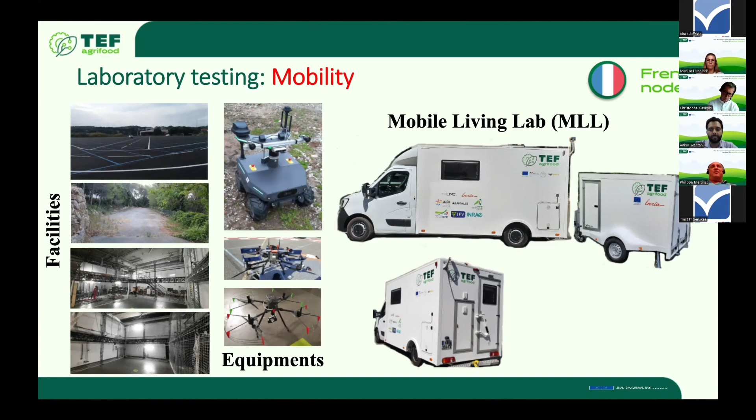We have mobile robot, we have UAV, and our particularity is that we have a mobile living lab, so we are able to move the laboratory to the land. Thank you for your attention.

The first one is this one, so it's a 100% simulation facility, in which any kind of AI developer or perception or mobility algorithms developer can reach out to us and just ask us to build up this simulation environment. It's 100% tailored to his needs and how we can develop his solution. And we are providing him all kinds of different sensors for vision and perception. It could be LiDAR, vision, infrared, or thermal, for example.

And we can test it together with him in order for him to, for example, choose any kind of sensor that is adapted to his use case, and also to provide him some new data that could be used to test the robustness of his algorithms. That's how it helps him develop his solution and assess it in terms of performance. And of course, that's 100% simulation, so we don't rely on the land and we don't rely on real data acquisitions. So our partners save time and also raise their TRL levels quite easily through simulation.

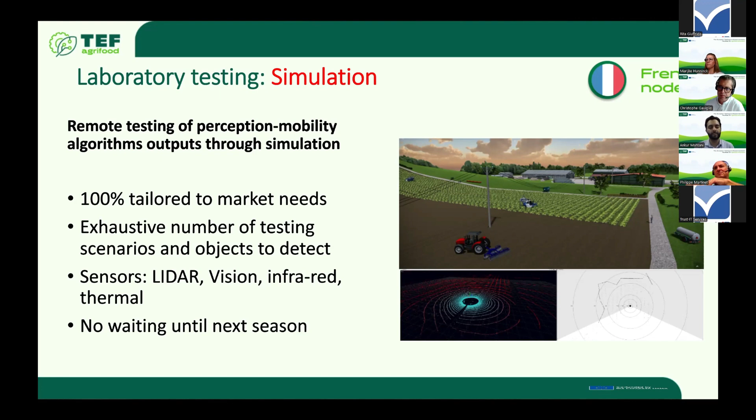And another facility, which is on the next slide, is the robot immersion, in which you have the simulation area, which is 100% exhaustive and in which we can test any kind of obstacles or algorithms. And it's hybrid with some hardware-in-the-loop system. So we can test the robot, host it in this kind of infrastructure, and have it run just as it would in a real land, for example. And we can test all kinds of performance.

For example, one important performance is the processing performance and response time. It's very important to have that quantified before going to the land and before testing it in real life conditions. We can also test grip and ground resistance on the conveyor belts you can see here in the picture. And we can test the complete chain of acquisition and processing up to the decision of moving the robot in one way or the other.

And finally, all these evaluations and tests of embedded AI help provide some simulation inputs to our partners, and also test robustness against, for example, glaze. So we can simulate glaze in this infrastructure, sunlight, or even different kinds of noise. And we can, of course, measure the response of the robot. Finally, all the perception edge cases can be tested here, and also virtual destructive testing if we want, for example, to test the collision of a robot with an obstacle before going to the land.

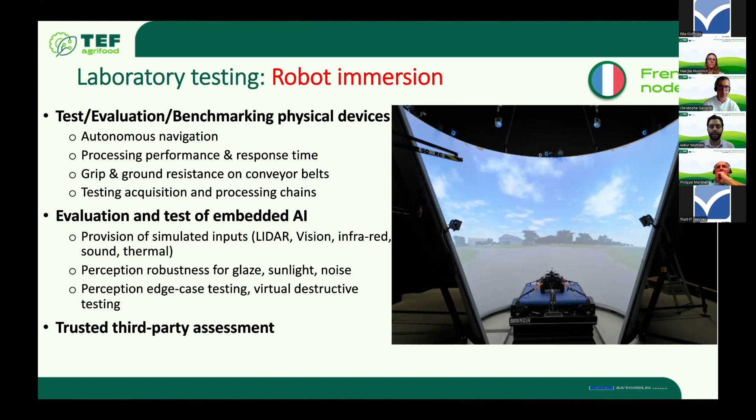And of course, LNE is a trusted third-party assessment, so we can do it as a trusted partner also, and that helps our partners prove their performance and also gain trust in their solution. I'm now going to give the mic to my colleagues from IFV and Arvalis, who are going to present robot testing in viticulture and in arable culture.

Thank you and good morning, everyone. So I will start and I leave the floor to Régis for arable culture after. I'm going to start with viticulture. I work in the French Institute for Vine and Wine, and I'm going to explain how we can provide services in agrifoodTEF for robotics.

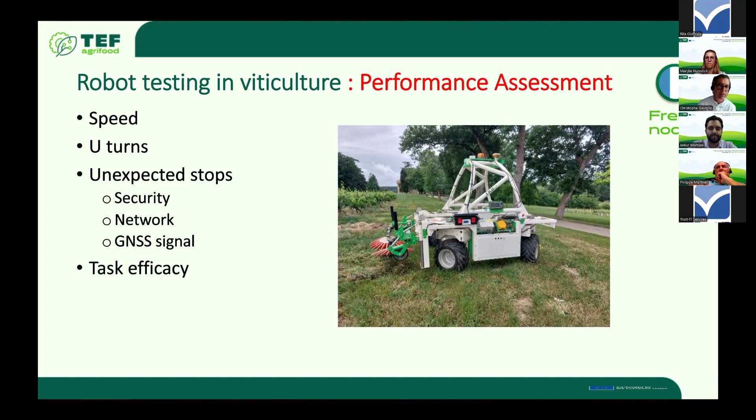I'm going to present 4 use cases, and the first one is robot testing for performance assessment. Obviously, we can measure all the very important parameters to determine the global performance of a viticulture robot. For example, speed, the time it takes for the robot to make a U-turn. We can measure and determine why we have unexpected stops in the field—is it for security matters, for network matters, and so on. And last but not least, we can measure the efficacy, the efficiency of the task that the robot is supposed to do. In viticulture, it's most of the time weeding, so we can assess the weeding efficacy. This gives us a global assessment of the performance.

The second thing that we can provide in the agrifoodTEF project is prototype development.

Here we have a map which represents the experimental vineyard that we have. It's almost 15 hectares of vineyard with different kinds of soil, different conditions of slopes, and also all the facilities to store a robot, access to a workshop if we have to work on the robot, to make changes, also access to charging points for the electrical robots, and every facility you need to assess the performance of a prototype.

Of course, we can benchmark this performance with all we know about the practices in viticulture. And this is interesting for every robot manufacturer, to know how a prototype fits the end user's needs before launching it on the market.

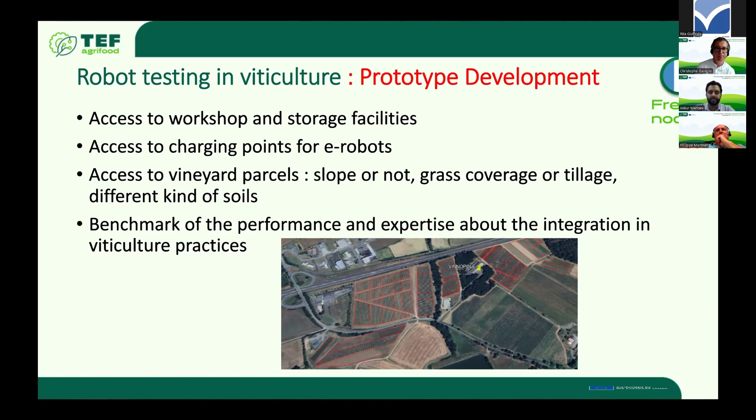So the third service we can provide in matter of robot testing is a cost and benefits assessment, because robots are meant to do the weeding essentially, but not only. And we are able now to compare the cost of use of a robot with the cost of use of a tractor in the vineyard.

On all aspects of the cost, like operation, maintenance, and workforce burden during the use. Of course, we can complete this cost and benefits assessment with life cycle assessment, because we have some specialists at IFV, not on our experimental vineyard, but we can collect all the data that they need to do the life cycle assessment.

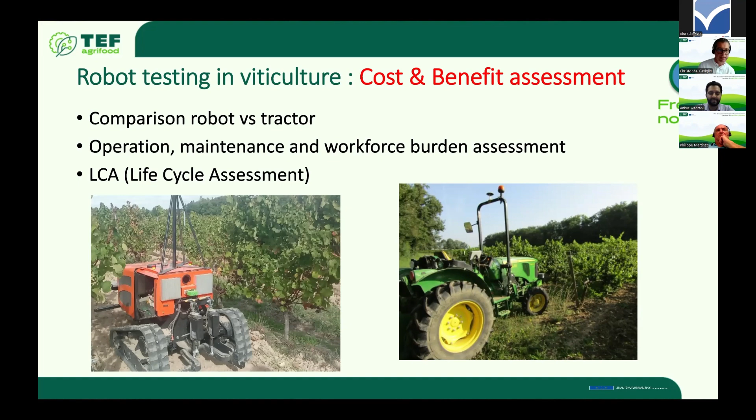The fourth service we can offer about robot testing in the vineyard is the agroecological approach that we can bring, because this is a big subject today. Robots are meant to use less pesticides in the vineyard.

And we can compare all the production process in the vineyard with or without robots. We can assess the impact of robot use on soil compaction, for example. We can assess also the use of energy for the same tasks. Of course, we can measure the impact on chemical inputs, and of course on the efficiency.

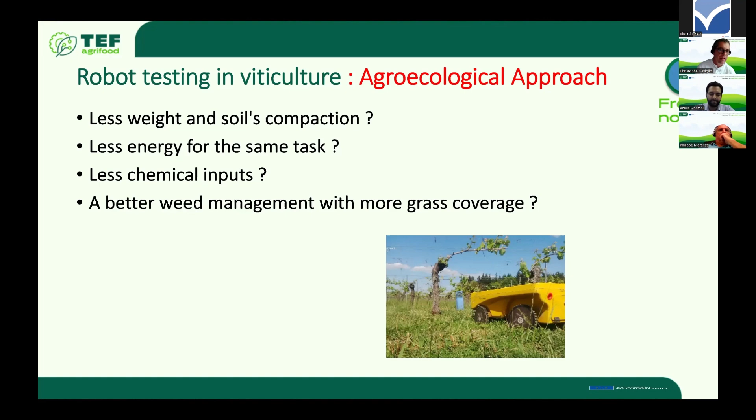Thank you very much. Bonjour, with my French accent on my horrible English. Well, Arvalis, it's also a technical institute like IFV, like Christophe, but we are specialized in crops and mainly in wheat, maize, and also flax and potatoes.

The largest scale that we can offer is to test, calculate, or estimate what will be the consequence of a robot in the cropping system at farm. And for this, we've got a quite good tool. The name of this tool is Systerre. It's a web tool, and we have a lot of different kinds of farms, for example, farms with lots of wheat or other kinds of farms, and we can just estimate what will be the effect of the use of a tool.

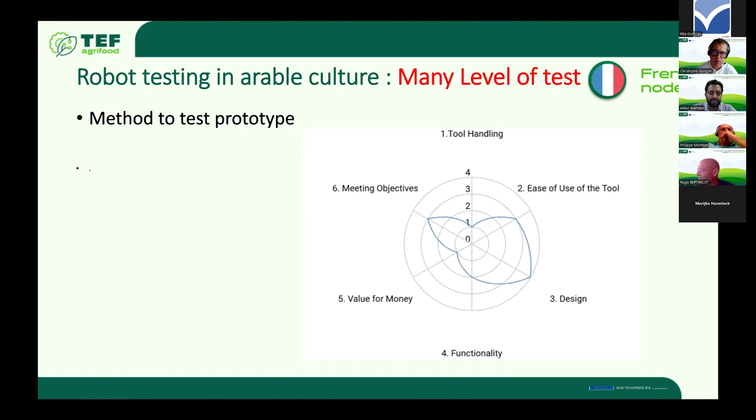That means there is a mix between the map of data sensor acquisition and the map of presence of weed. And of course, we also control by hand, because our job is also to go on field and check if the robot did a good work. In the last picture, you see two technical people checking if the effect of the robot was good or not, and they need a precise location, so they use a very precise pedestrian GPS.

So these are just some examples of what we can do in Arvalis for your robots, from the insertion of the robot in the cropping system to testing a technical part of your robot. Thank you.

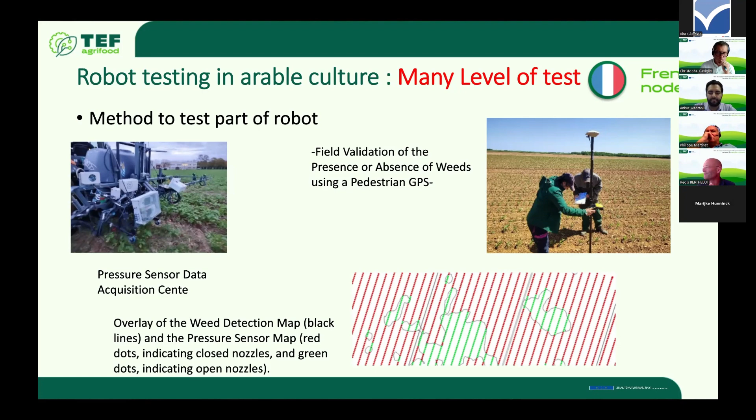Okay, thank you, Regis. I'm Adriana Sanchez from the French Research Institute for Agriculture, Food and Environment, and I'm presenting the safety and performance testing for autonomous machines.

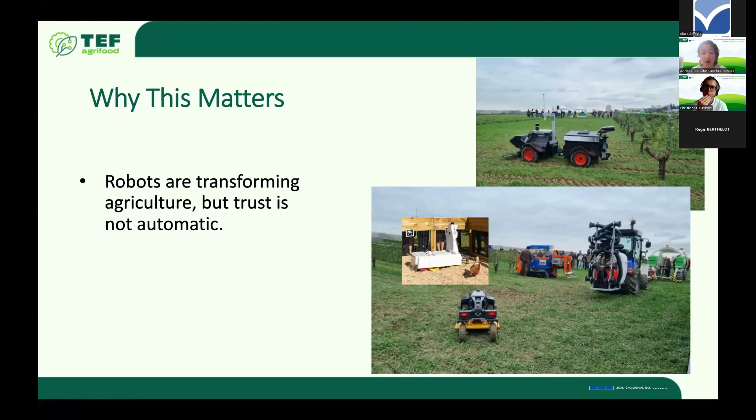So to start, let's make clear that autonomous robots offer significant benefits for agriculture and are transforming the way we produce food. But now I propose we take a step back and ask ourselves, are these robots safe enough? Because robots operate in complex conditions and environments, while they must ensure safety.

This is where robots testing and validation becomes essential, and it's where we come in. Through the AgrifoodTEF catalog, AgroTechnoPôle, which is the platform involved in this project, we offer 6 agricultural robotic performance assessment tests, better known as ARPA, which are essential to test if your robot is ready for deployment from the safety and performance point of view.

The first 4 tests are related to safety, and the last 2 are related to trajectory performance. Let's take a quick overview. ARPA 1, for example, helps you ensure that your robot can detect and react to static obstacles, which offers a huge advantage of reducing the risk of accidents.

With ARPA 2, we go further by testing how your machine performs in hard conditions such as rain or fog, and this helps ensure that the robot operates reliably in these conditions.

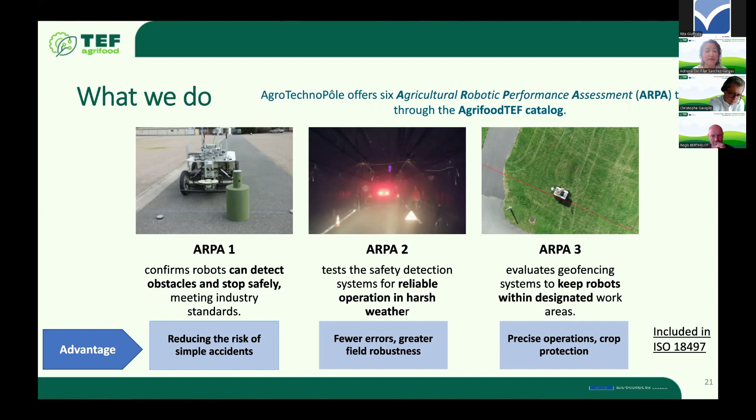ARPA-4 verifies that your robot can detect humans and stop automatically when it detects them. The huge advantage here is that this makes the work environment safer and provides peace of mind to everyone, from the farmer to the constructor.

Remember that those 4 tests are designed to verify safety in robots, and the last 2 tests, ARPA-PC1 and ARPA-PC2, are essential for assessing your robot's trajectory performance. ARPA-PC1 is focused on crop conditions, while ARPA-PC2 is tailored for livestock robots, ensuring functionality and efficiency in diverse agricultural settings.

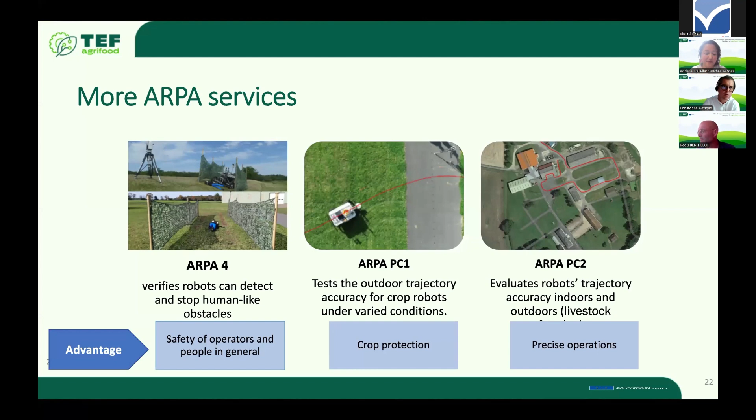So let me take a moment to share how we operate, underlying 3 pillars that shape our testing process. First, we use a strong methodology designed to address companies' needs, grounded in well-known established protocols that are aligned with the ISO 18497 standard, and most of them are included in that standard.

Second, our expert team has extensive experience in agricultural robotics, and they also contribute to developing international standards. And finally, our advanced infrastructure and testing facilities, located in the middle of France, 2 hours from Lyon, in Montoldre, provide controlled conditions that lead to reliable and robust outcomes.

Of course, it's complicated to show everything here, so please, if you are curious, take a look at our LinkedIn page. We post regularly from the AgrifoodTEF France account and our particular LinkedIn account to show what we are doing, how we are testing, and so on.

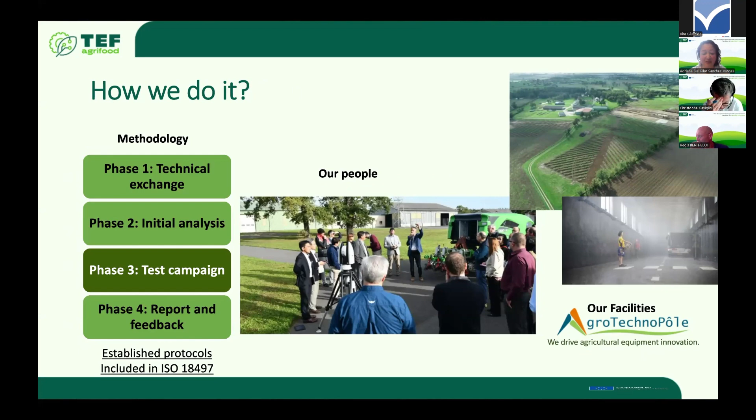So why does this matter for you? If you belong to an EDIH helping companies innovate, we are here to ensure those innovations succeed by testing their safety. And if you are a company that creates robots, this testing is essential because we empower you with insights into your robot's performance, enabling you to take better technical and strategic decisions. In the end, we provide you with confidence in the safety and reliability of your robotic system.

So finally, an invitation to connect after the webinar. We will be happy to talk about your current challenges. In the next slide, you will find our contact information, so please take a screenshot so we can stay in contact.